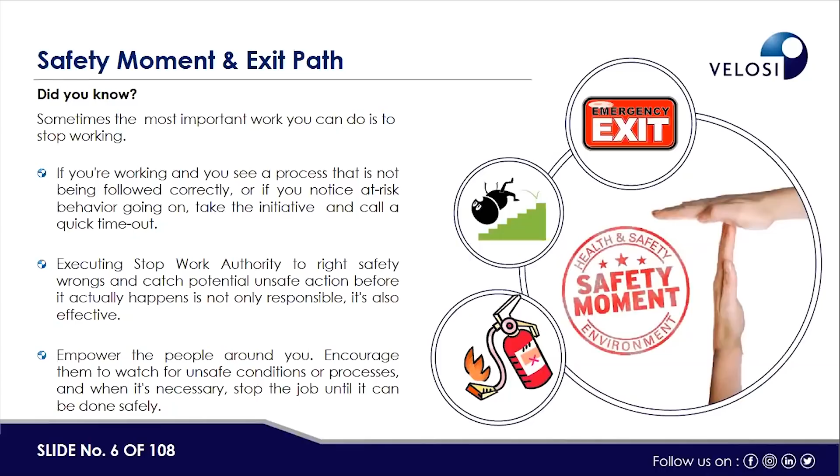Thank you. Assalamu alaikum and good day, everyone. Today's topic is basically focusing on SIMS, Structural Integrity Management System, and that would be specific to offshore, because onshore structures are also part of SIMS, but technically the case studies regard offshore. However, the concept is applicable both for onshore and offshore sites.

From a topic point of view, what is asset integrity by definition? It covers 3 elements: design integrity, technical integrity, and operational integrity. As a basic definition, asset integrity is a continuous process of knowledge and experience applied throughout the life cycle of an asset to manage the risk of failure and events in design, construction, and during the operational phase of the assets. Design integrity means ensuring design for safe operations.

Technical integrity means keeping it in order, with proper processes of inspection and maintenance planning and execution as applicable during the life cycle of the asset. Operational integrity means keeping it running, which involves appropriate knowledge, experience, manning, competence, and decision-making data to operate the plant as intended throughout its life cycle.

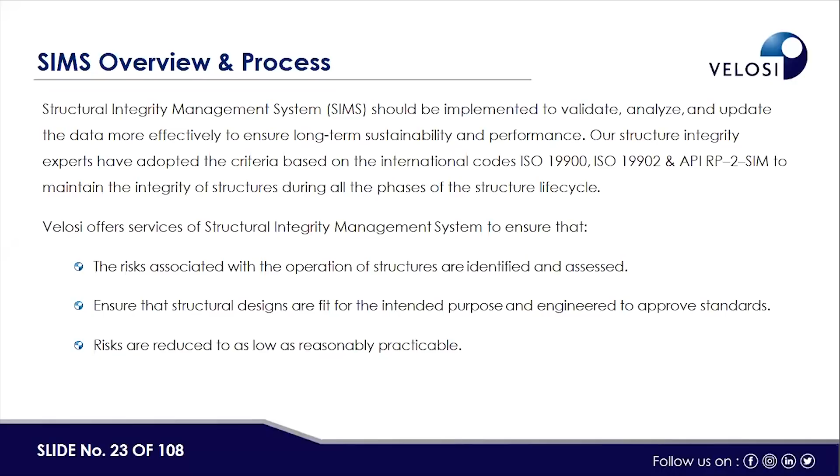The objective of the structural integrity management system, as I said earlier, we are focusing mainly on offshore, but it is applicable onshore as well. It should provide evaluation of structural damage, covering both above and below seawater inspections, fitness to purpose assessment, any possibility of risk reduction, mitigation planning if there is any kind of damage, and the process of decommissioning should also be covered under the same system.

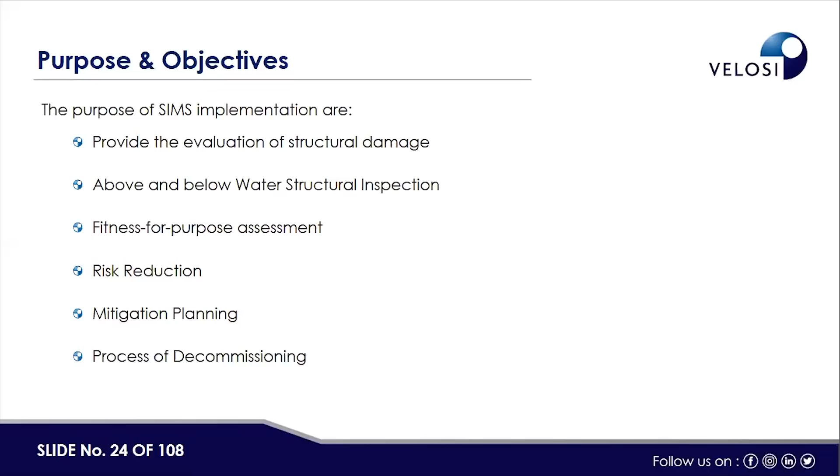From an offshore structural life cycle point of view, if we look at the normal process of life cycle management of subsea structures: first is the original design of the subsea structure, then construction, installation and commissioning, then structures are in the operational phase. These are the 3 main steps.

At the design stage, there are various sets of documents mainly applicable to offshore structures. First is the design basis of the structures, then weight control report for whatever equipment or facilities would be installed on that particular platform. Then there's in-place analysis, pushover or non-linear analysis, fatigue analysis, transportation analysis, load out analysis, and lifting analysis.

Offshore structures are built onshore at a jetty area or offshore construction facility, then moved offshore by barge, and the jackets and top decks are installed with the help of barges, either by lifting or by load out mechanisms. So various kinds of studies are required, with the minimum referred in accordance with API RP2A standard.

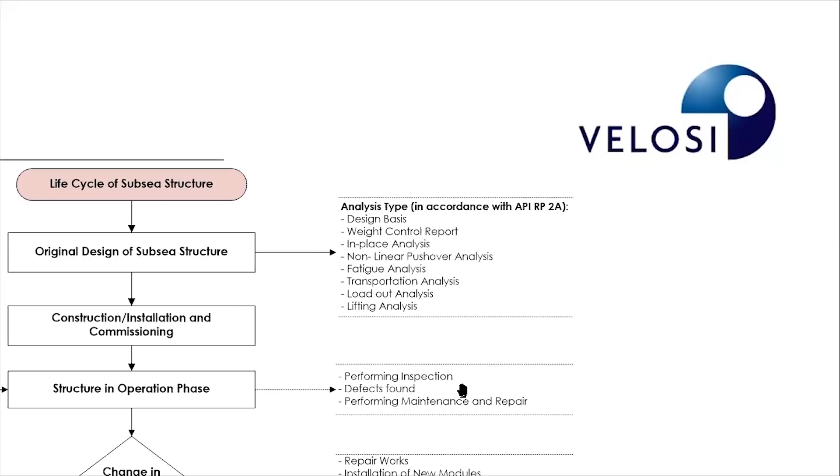Once the structure is in operation, required inspections are performed, which can be done by divers through visual inspections or by ROV. If any defects are found, those defects are repaired or maintained to the acceptance level. There are also cathodic protection anodes, whose depletion rate is monitored, and repair or retrofitting of these anodes is done as life goes on.

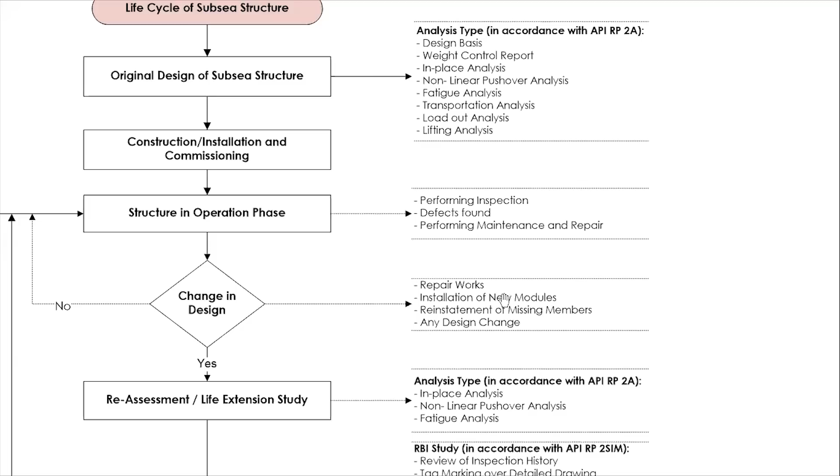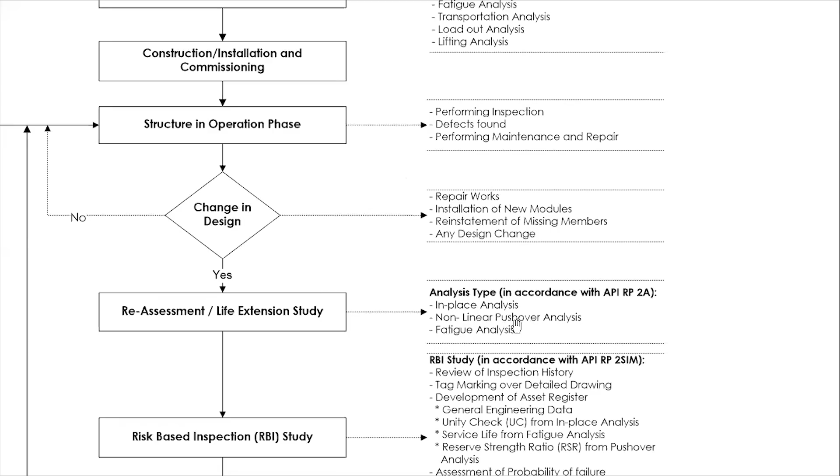If there is any defect or a flooded member found in the structure, repair is required, or installation of new modules or supports as per requirement, or reinstatement of missing members, or any design changes, managed as part of the design change process. If applicable, reassessment and life extension studies are done through fatigue analysis, pushover analysis, and in-place analysis, and decisions for any modification, extra support, or additional member installation are based on these recommendations.

Once it is done under the RBI process, what we do normally in the risk-based inspection program, what Velosi used to develop for future inspections, is the review of previous inspection history, tag marking over detailed drawings, development of asset register based on general engineering data, and unity check from in-place analysis.

Service life from fatigue analysis, reserve strength ratio RSR from pushover analysis - these values are used for probability of failure analysis, then assessment of consequence of failure, risk assessment, and inspection planning. These inspection plans are used in the CMS or ISMS system.

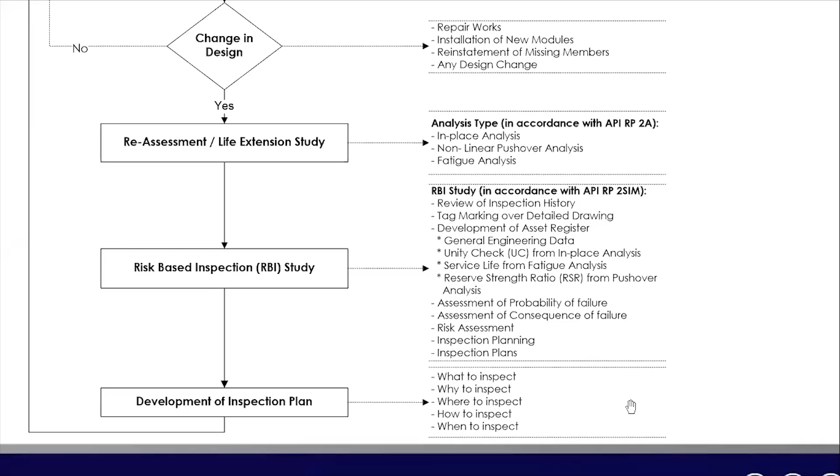When developing the detailed inspection plan, questions like what to inspect, why to inspect, where to inspect, how to inspect, and when to inspect are answered as part of the development of the inspection plan.

For data acquisition and management, when trying to develop the system, we normally need the as-built drawing. Our focus is basically now the asset in operation.

We assume the structure is already designed, built, and installed in the field, supporting operations via the process facilities installed on top of these structures. So what we need to care about now is how to plan the inspection for these subsea and above-sea structures, carrying out applicable inspection and maintenance activities.

For that purpose, we would be following or establishing the SIMS system as the basis. For the asset or structure in operation, we need as-built drawings, previous analysis reports and models, geotechnical data, inspection reports, metocean data of the field, equipment layout drawings, details of modifications carried out to date, existing weight report, and structural design basis.

General regulation and industry standards for offshore structures mainly focus on API RP 2A WSD, for planning, designing, and constructing fixed offshore platforms using working stress design, and API RP 2 SIM, structural integrity management of fixed offshore structures.

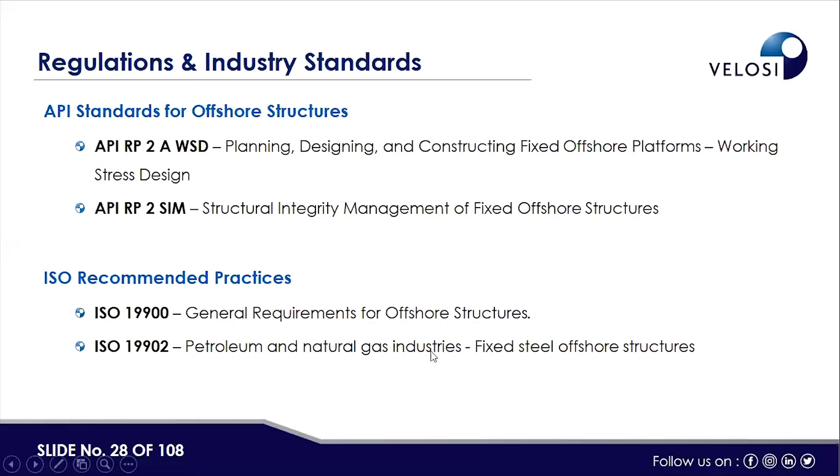Then there are ISO recommended practices: ISO 19900, general requirements for offshore structures, and ISO 19902, petroleum and natural gas industries fixed steel offshore structures.

If we look at the SIM index, titled structural integrity management of fixed offshore structures, various editions are available, the latest being September 2020. As a normal index, for those not familiar with this standard, it covers the scope, nomenclature, various terms and definitions, then structural integrity management overview, which covers general competency, risk, and limitations of the standard.

The structural integrity management process covers data, evaluation, strategy, program, and decommissioning. What kind of surveys or inspections are required is chapter 6. Damage evaluation is covered under chapter 7, and structural assessment processes are covered under chapter 8. It's easy to follow if we just follow the structure.

Similarly, other chapters: chapter 9 is assessment of metocean data, chapter 10 is assessment for fatigue loading, chapter 11 is assessment for seismic loading, and assessment for ice loading applies in areas like Canada or Russia where temperatures are low.

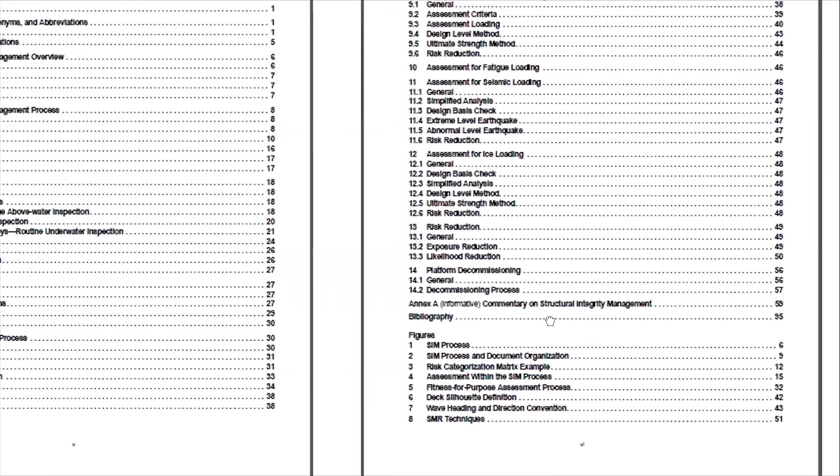Risk reduction practices applicable to structures are covered in chapter 13, and platform decommissioning is covered under chapter 14. So there are a total of 14 chapters, with figures and Annex A that can be easily referred to while applying this practice or developing your SIM system.

The other one is structural integrity management of fixed offshore structures, API RP 2 SIM. The purpose of this recommended practice is to provide guidance to owners, operators, and engineers in the implementation and delivery of a process to manage the structural integrity of existing fixed offshore platforms. This process is called the structural integrity management system, SIM.

The same system can also be used for floating structures, for example an FPSO or FSO, and also subsea structures could be covered under the same system, but we need to add the details of required or applicable criteria for these kinds of assets. This recommended practice provides guidance for the structural integrity management system of existing fixed offshore structures used for drilling, development, production, and storage of hydrocarbons in offshore areas.

Then analysis at the design phase of offshore structures - we give a brief definition of what analysis is required to be conducted. For example, the objective of assessments is to establish current stress levels using latest applicable standards, loading, and in-place conditions, and performing non-linear pushover analysis to establish the reserve strength ratio RSR of the structure.

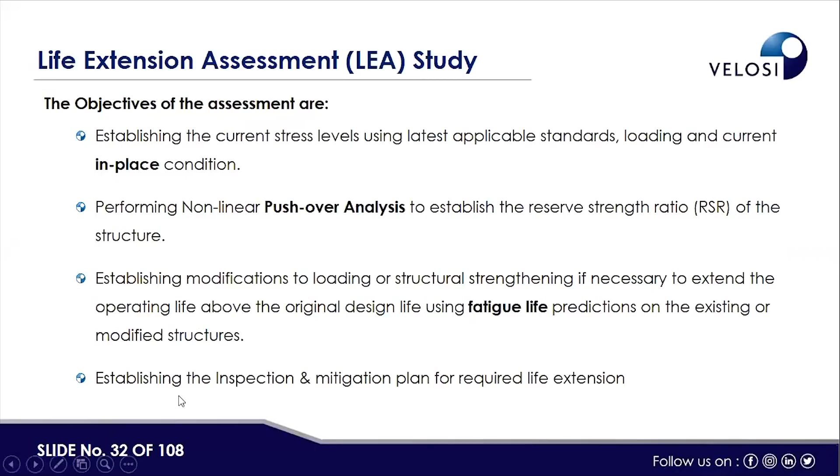Establishing modifications to the loading or structural strengthening if necessary to extend the operating life above the original design life of the structures, using the fatigue life concept. Then establishing the inspection and mitigation plan for the required life extension of the structures.

Now, under in-place analysis, which is the first one: the aim of performing in-place analysis is to ensure that offshore structures withstand the load during operation, both gravitational loads and environmental loads, and should be able to survive extreme weather conditions in the sea.

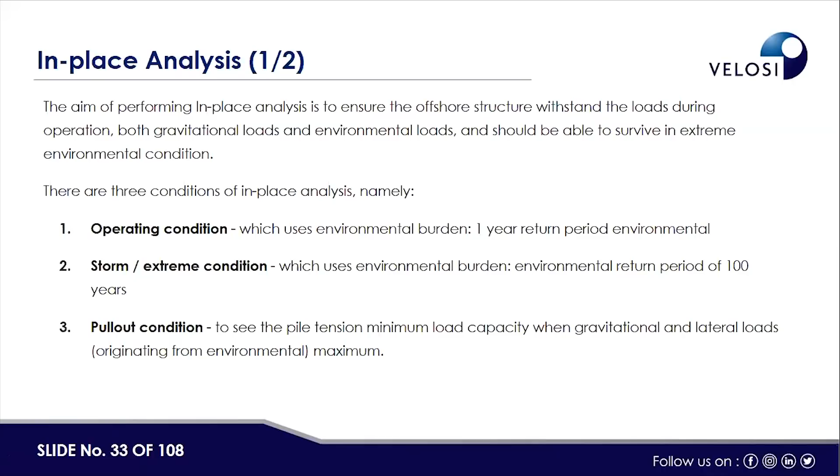There are three conditions of in-place analysis, namely the operating condition, storm and extreme weather conditions, and pull-out conditions. All these three conditions should be modeled while designing the structure, using software like SACS or other DNV software available for in-place analysis.

Similarly, the following results from the in-place analysis should be checked against the recommendation of API RP 2A. For example, member stress ratios, punching shear check, hydrostatic collapse check, pile capacity and stress ratios, and maximum displacement in the members.

The next analysis is the pushover analysis. Pushover is a static non-linear analysis method where a structure is subjected to gravity loading and a monotonic displacement-controlled lateral load pattern, which continuously increases through the elastic and inelastic behavior until an ultimate condition is reached for the structural joint or member.

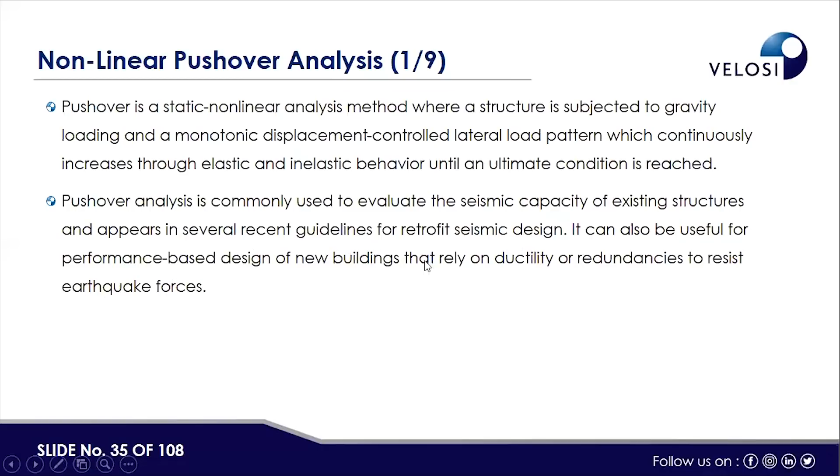Pushover analysis is commonly used to evaluate the seismic capacity of existing structures and appears in several recent guidelines for retrofit seismic design. It can also be useful for performance-based design of new buildings that rely on ductility or redundancy to resist earthquake forces.

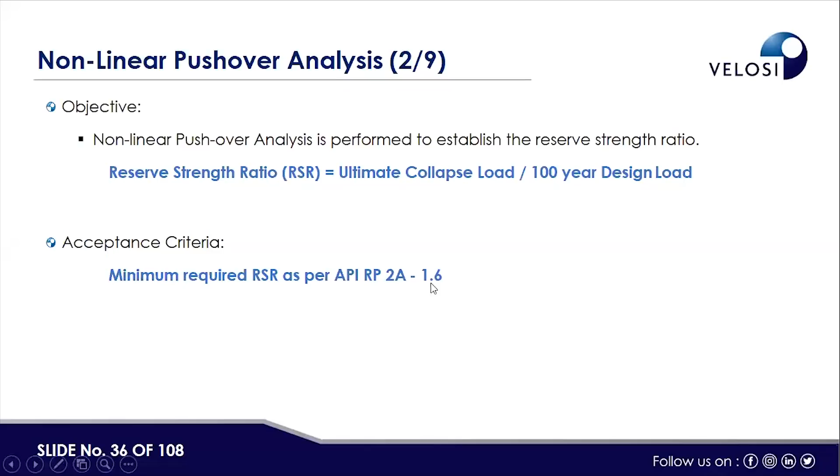The objective of the non-linear pushover analysis is to establish the reserve strength ratio. The RSR is equal to ultimate collapse load divided by the 100-year design load. The acceptance criteria factor should be a minimum of 1.6.

The pushover analysis model intact case requires completely modeling the structure, including the jacket part, deck part, and process part up to the helipad area. For the pushover analysis model damage case, similarly, it has to be covered fully, and if any damage is present, that has to be modeled and shown in the analysis.

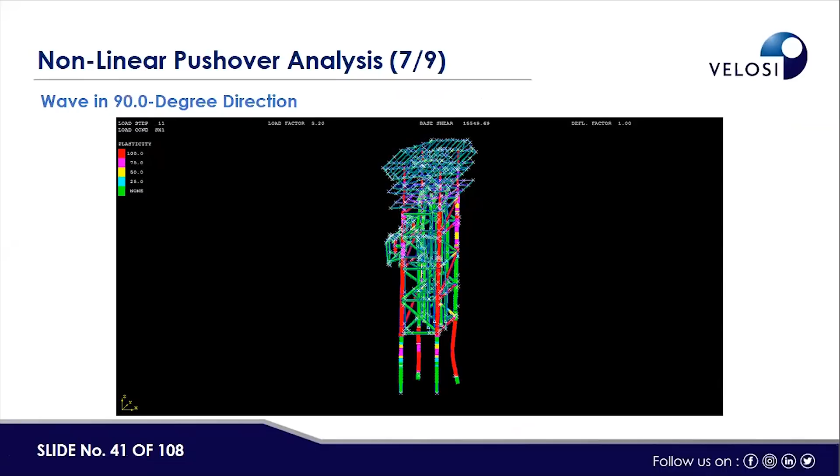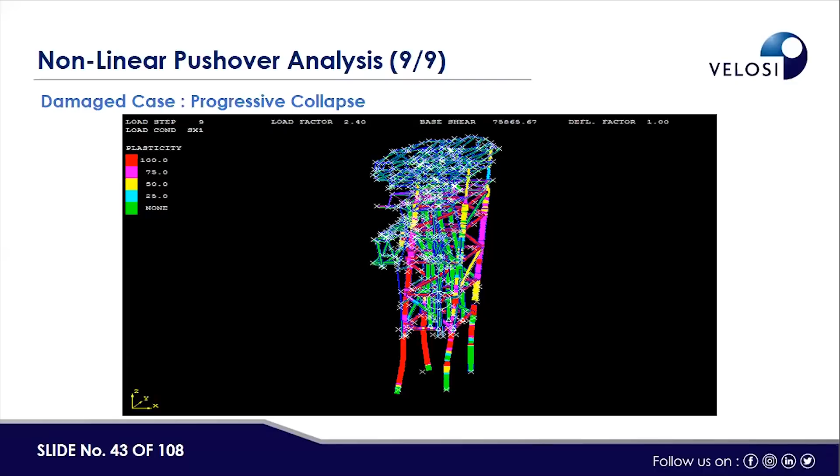We are not covering how this analysis should be done, but just showing what kind of pictures and data are available from the analysis when structural engineers perform it, which ensures users and operators that our structure is safe to operate, whether we are living in the same living quarters in the sea, and during extreme weather conditions we can ensure ourselves that we are in safe hands or a safe place.

Then fatigue analysis is relatively easy compared to in-place analysis. Here, normally we try to establish the fatigue life of the structures and whether it is more than 50 years or more than 100 years. Fatigue analysis is an aspect of vital importance in establishing the dimensions of offshore structures.

This is because of the cyclic nature of environmental loads, particularly sea waves, and the presence of high stress concentrations at tubular node joints due to current and waves under the sea. In the fatigue analysis, the sea surface is represented by a discrete set of waves characterized by period, amplitude, and percentage of occurrence. The expected fatigue life is then obtained by applying each wave to the structure and totaling the individual effects.

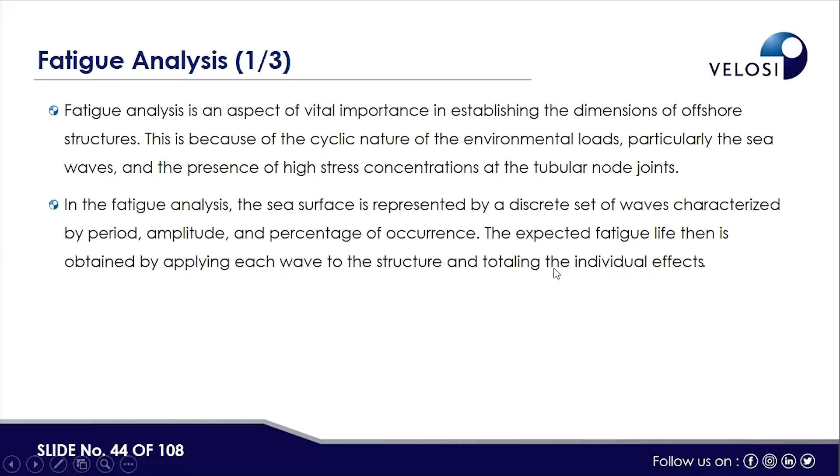What is fatigue? Cyclic loading causing fatigue that, with time, may result in cracks at welded connections of the structural components, joints, or members at any place, though it is mostly critical members.

Unless crack propagation is arrested, the crack can eventually lead to member failure at the joint. The propagation of the crack may affect other members at a joint as well. Cracking originating in a secondary brace, main member, or connection may eventually grow into and affect a primary member as well.

The result from the fatigue analysis is the remaining fatigue life of an aging fixed offshore structure. The acceptance criteria requires that joints on the jacket should show a fatigue life of more than 100 years.

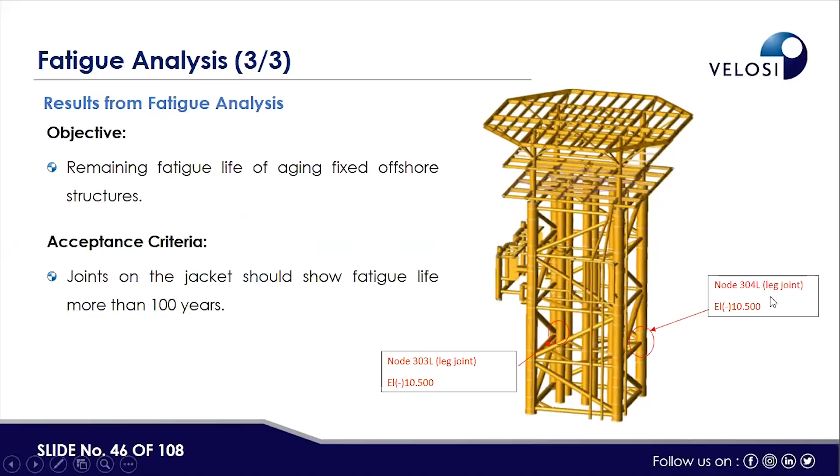And there are members where the nodes have limitations on fatigue life. This side, this joint, you can see here.

A case study, the detail would be covered by my colleague, Mr. Imran Saeed, but there is scope and SIMS content I will cover, and then we will have a break, and then Mr. Imran Saeed will start. So the case study is the implementation of SIM software for offshore platforms that we have done for a major oil and gas company in this region.

The project scope of work was development of a structural integrity management system, a documented system. Then perform risk-based inspection study for the structural platform. As a sample we are showing MDA, JKA, and JKB, the names of the platforms. Then perform criticality assessment, develop an inspection plan for mitigating the risk and reducing cost, and a future inspection plan to be carried out by the client.

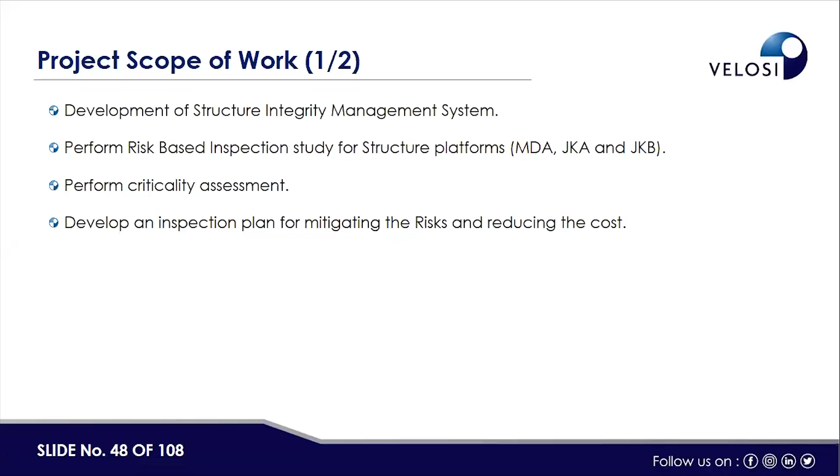Quantification of asset for risk-based inspection study: MDA had total components like members and joints of 382, JKA 2710, which was a major CPF, then JKB 1306. The total asset covered in MDA, JKA and JKB for RBI study is 4398.

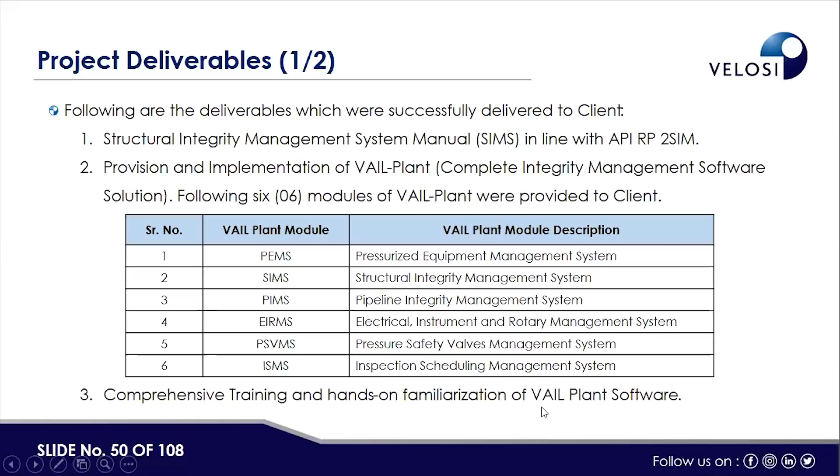The following was the deliverable for the project: structural integrity management system, SIMS, in line with API RP 2SIM, then provision and implementation of VAIL Plant, a complete asset integrity management software solution. Six modules were covered: PEMS for pressurized equipment management system, SIMS for structural integrity management system, PIMS for pipeline integrity management system, EIRMS for electrical, instrumentation and rotary management system, PSV-MS for pressure safety valve management system, ISMS for inspection scheduling management system, and comprehensive training and hands-on familiarization of VAIL Plant software was also part of the scope.

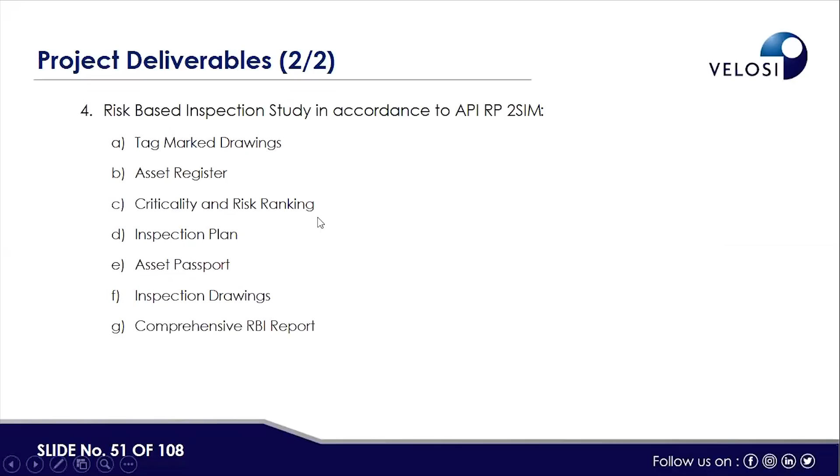Project deliverables for this structural aspect include tag marking on the drawings, asset register, criticality and risk ranking, inspection plans, asset passport, inspection drawing, and comprehensive RBI report.

This is the first part, development of the structural integrity management manual. Velosi prepared the structural integrity management manual in compliance with API RP2 SIM and the company's requirements. The SIM manual covered implementation plans and other aspects required to construct the SIMS program, and applicable standards and literature were used as reference.

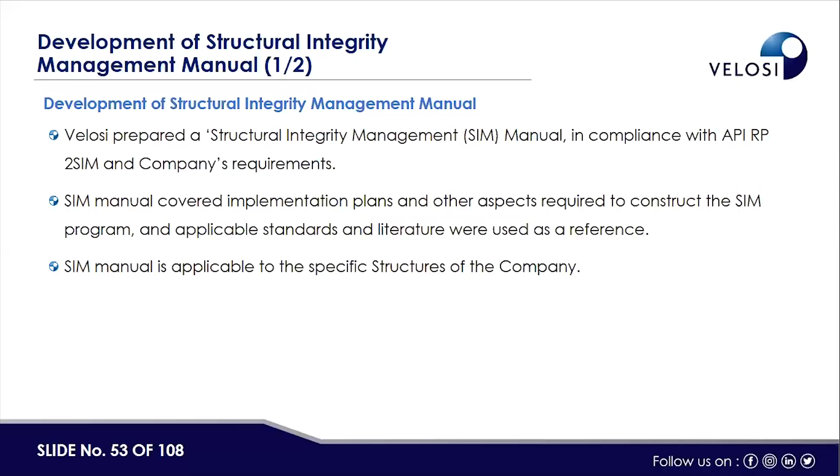Before we go to the SIMS implementation approach, my colleague will take over from here, and we can have some question and answers, whatever questions are there.

There is one question we already discussed: for the structure, does it need a periodic inspection? If yes, what is the frequency for the inspection, and how to define the inspection frequency and prepare the scope of work for the inspection. This will be covered in the next section, and all these questions will be answered, including how we develop the inspection plan, what is the RBI process, and how the interval is also determined by the same RBI process.

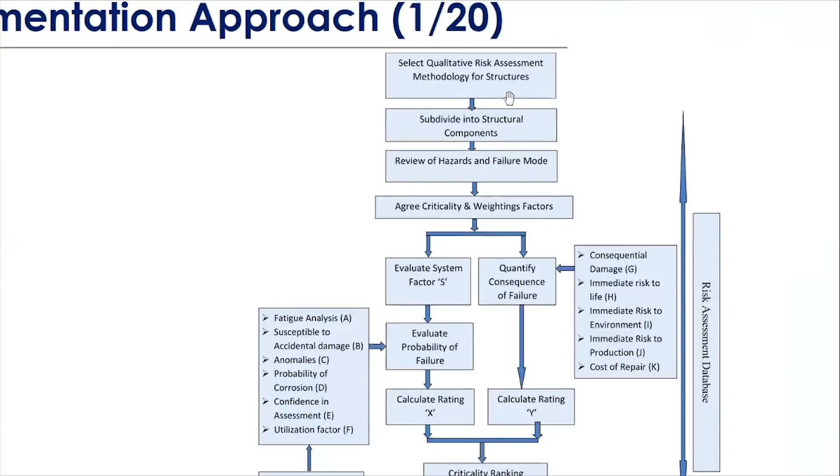Now we are in the second part of the presentation, the SIM implementation approach. If you see this flow diagram, first of all, as part of the risk assessment for the structure, we have to divide the structure into different components: primary component, secondary component, and tertiary component. Then against each component, review of hazards and failure mode.

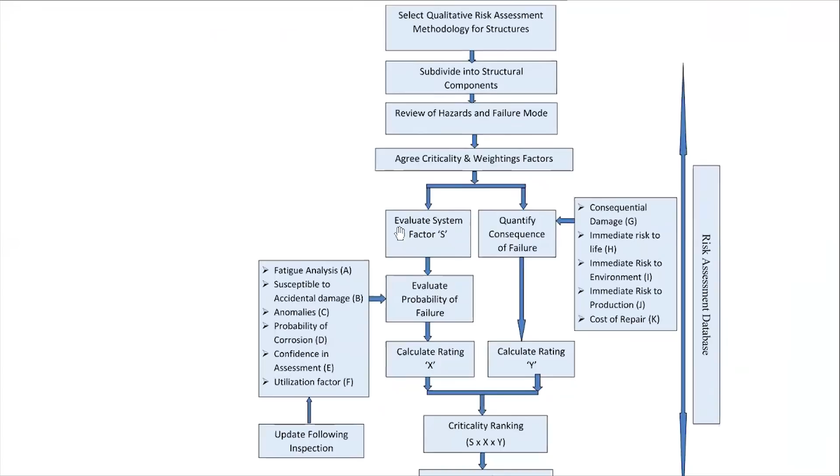Then for a criticality assessment, basically we are considering 3 parameters: the system factor, the probability of the failure, and the consequence.

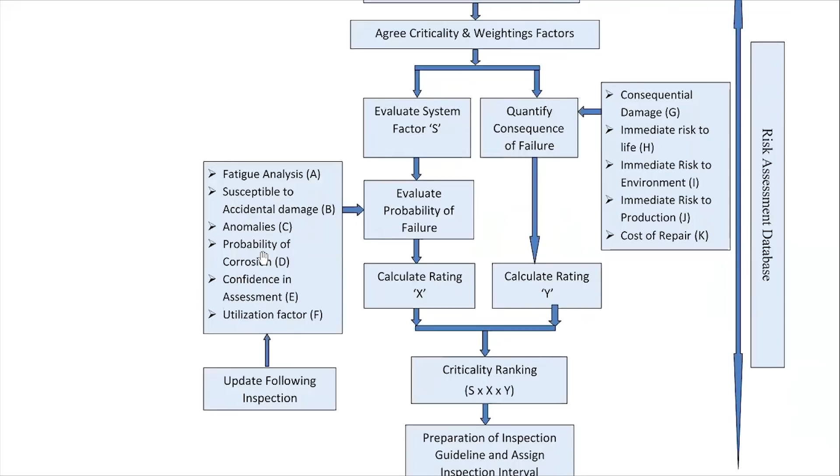System factor is evaluated based on the redundancy factor and the resistance ratio, whereas the probability of failure is calculated on 6 parameters like fatigue analysis, susceptibility to damage, anomalies, probability of corrosion, confidence in assessment, and utilization factor. So these 6 factors are considered for the probability of failure assessment.

Whereas for the consequence of failure assessment, 5 parameters are considered, which include consequential damage, immediate risk to life, immediate risk to the environment, immediate risk to production, and cost of repairs.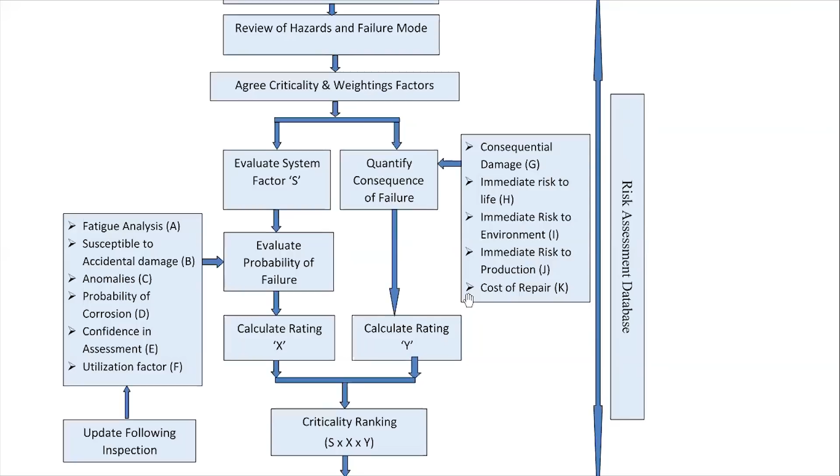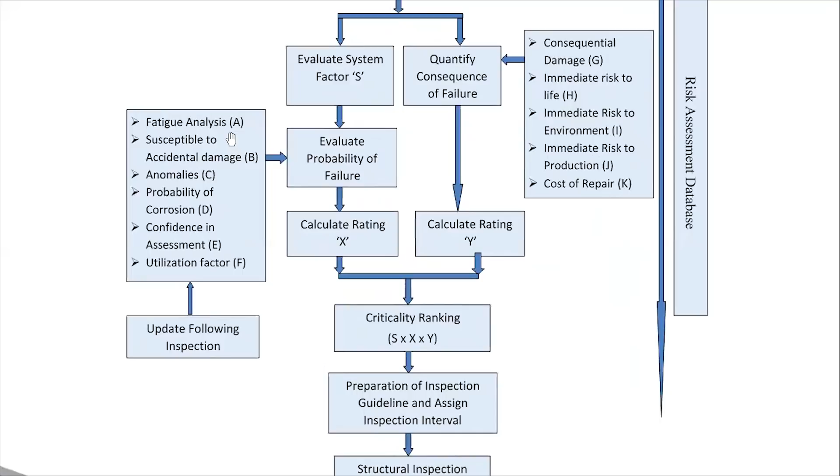Then, based on these 12 factors, we calculate the criticality factor, which is S, the system factor, multiplied by the probability of failure, that is basically the sum of all 6, and multiplied with the consequence of failure. Then, based on the criticality ranking, the inspection plan is developed.

The inspection plan consists of the inspection frequency, inspection coverage, and the type of inspection. So that is basically the overall approach.

So as part of the study, as a first step, the data collection includes the steps we explained: data and information gathering, platform subdivision into structural components, review of the inspection history, condition data, review of the fatigue analysis, in-place analysis reports and plot plans.

Development of the asset database, asset register, then identification of the potential damage mechanism, degradation mechanism, and calculation of the probability of failure, consequence of failure, and the system factor.

We have explained in detail in the previous slide what factors we consider for the POF. Similarly, for the COF, which factors will be considered. Risk ranking and calculation of the criticality, as explained in the previous slide.

The criticality would be the product of the system factor, probability of failure, and consequence of failure.

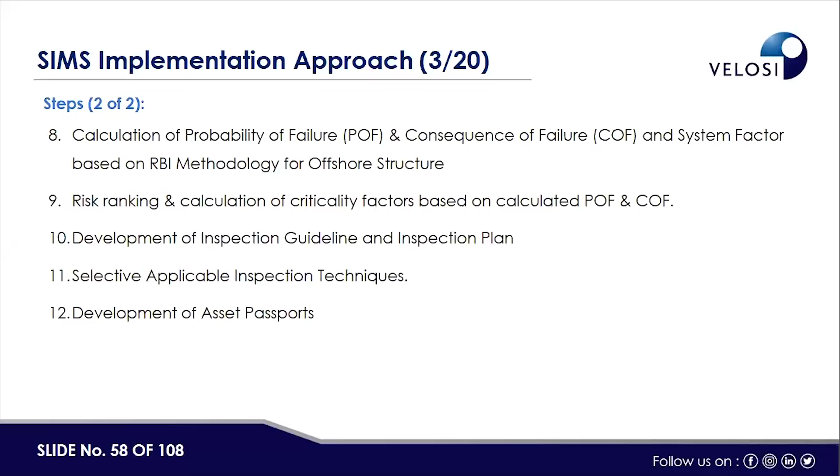After the criticality ranking, the next step would be the development of the inspection guideline and inspection plan. The inspection plan consists of: first, based on criticality, the inspection interval or inspection frequency; based on the failure mode, damage mode, type of inspection, and coverage of inspection; then selecting applicable inspection techniques; and development of the asset passport, or structure summary report.

As part of the SIM study, the following documents have been collected, or are required in order to carry out the study. These minimum documents consist of: structural drawings as built, 3D model if available, inspection reports, details of modifications carried out to date when we perform the assessment, repair reports, replacement and maintenance records, and others.

Then, as part of the analysis reports and models, if you remember when we talked about SIMS, there were a few documents we mentioned as part of the design basis: weight control report, in-place analysis, non-linear pushover analysis, and fatigue analysis.

These studies, which are carried out at the design stage or at any modification, need to be collected and considered in order to determine the criticality assessment.

So the second step, after the collection of data, the structure was divided into different components. The components will be the top side members, splash zone members, and below splash zone members.

The purpose of dividing the structure into different components is so that against each component we can check from the analysis results their fatigue, in-place analysis, pushover, and accordingly their criticality and inspection techniques can be provided in order to ensure the integrity of the whole structure.

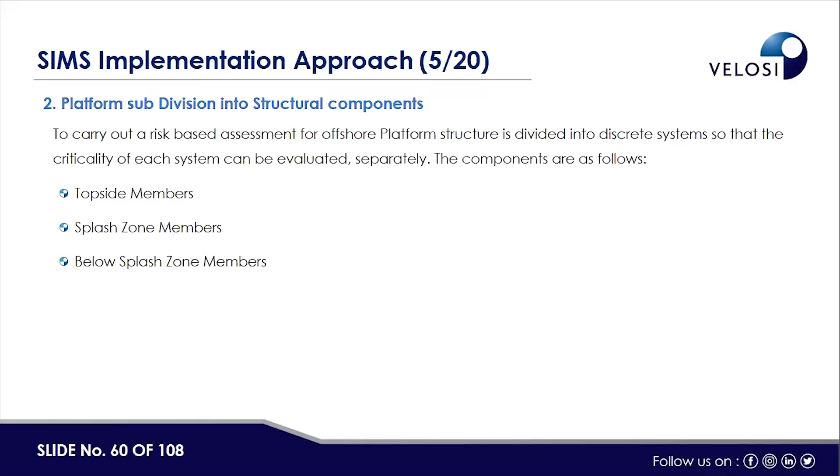So if you will see here, after the components are assigned and marked on a structural drawing, this is a structural drawing where all the vertical members, horizontal members, and the nodes are identified and marked.

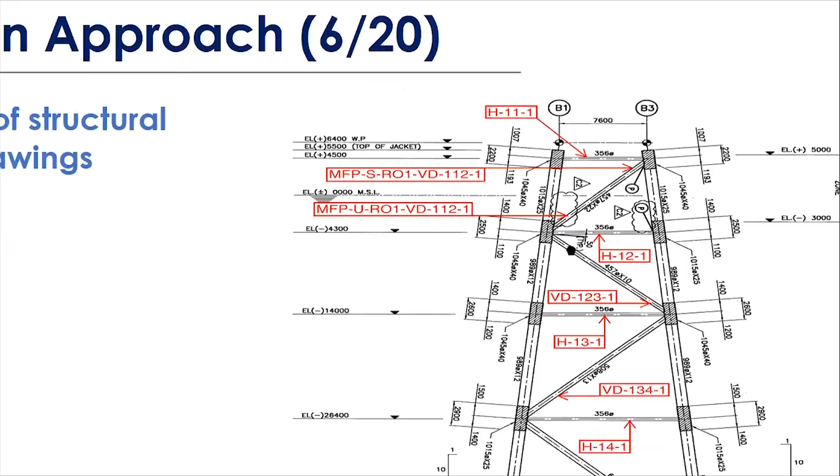If you see this one, there is a methodology. For example, for this horizontal member from one beam to another, the vertical member, similarly the nodes - so all these components are marked on the structural drawing. So against these components, we will check the data from the analysis reports.

The fourth step is review of the inspection history and condition data. The inspection history data and condition data represent the changes to the characteristics that may occur during the life of the platform.

The condition data includes the following: in-service inspection data, for example, underwater inspection, above water inspection, damage evaluation data, corrosion protection data, platform modifications, condition monitoring data, and operational incident data.

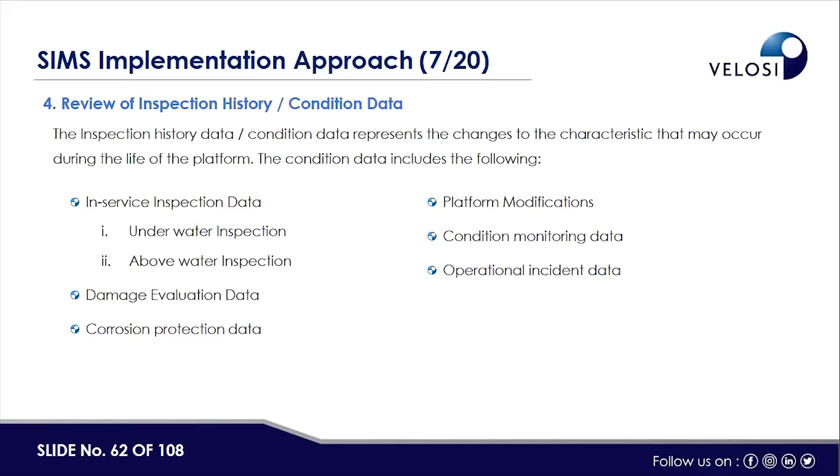So as part of the RBI study, we need to consider, as mentioned in the flow chart, the different parameter factors. The first step is in-place analysis as an input to the RBI study, from which we get the unity check value.

The unity check value, by definition, is the ratio of the actual stress over the allowable stress of the component. Based on the unity check values, we have assigned categories ranging from low to high, provided in the table below.

The unity check for joints and members is obtained from the in-place analysis report. Unity check values smaller than or equal to 1 satisfy the design criteria of a particular limit state. This is basically the acceptance criteria for any member or joint: the unity check value shall be less than 1.

If the unity check value and punching ratio are greater than UR 0.9 and PR greater than 0.95, we assign the category high. For the member UC between 0.85 to 0.9, and for joints between 0.9 to 0.95, medium category is assigned. If the unity check is less than 0.85, and for joints less than 0.90, we assign low category.

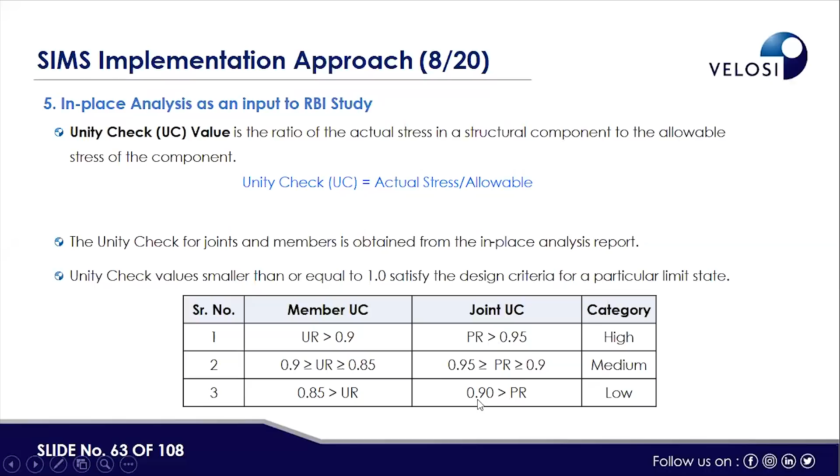Pushover analysis should be performed with intact and damaged structure to calculate intact and damaged RSR. To calculate the worst damage RSR, damages to the legs of the platform at various points should be simulated in pushover analysis, as my colleague Mr. Rijaz explained in detail during the first part of the presentation. Pushover results are required to directly quantify the probability of structure collapse resulting from a disconnected member.

The following should be used to select the system factor. For example, if the reserve strength ratio is less than 1, we assign the system factor weightage as 1.0. This system factor weightage is multiplied with the probability of failure and the consequence of failure. If RSR is between 1 to 1.2, then 0.8.

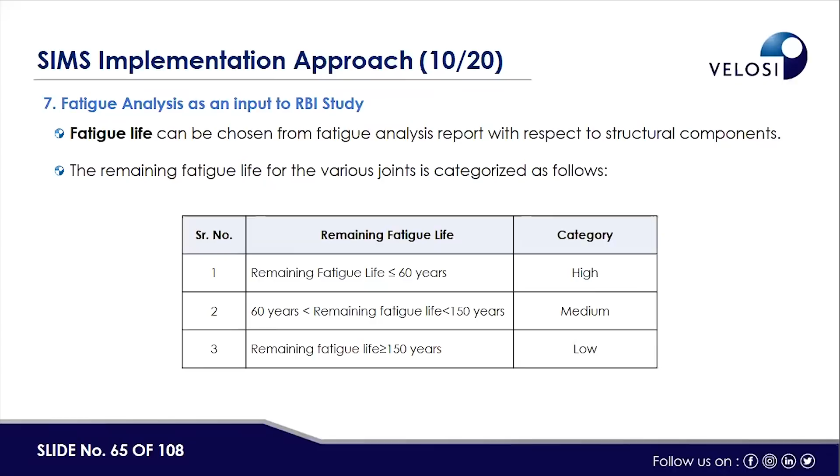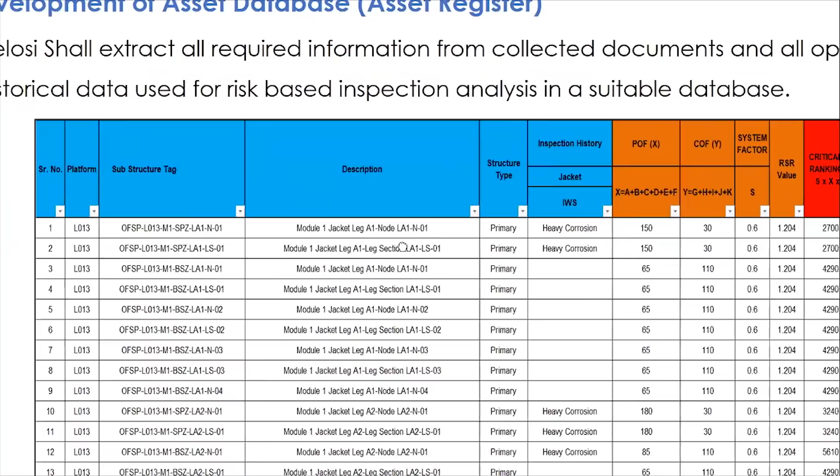After completing these steps, like dividing the structure into different components, we prepared a database including structure components, descriptions such as members, horizontal nodes, legs, the structure type whether primary or secondary, and from inspection history any corrosion damage that occurred. Then from the different parameters observed, we include probability of failure, consequence of failure, and the system factor derived from the RSR value. In this way, the database is prepared for the software.

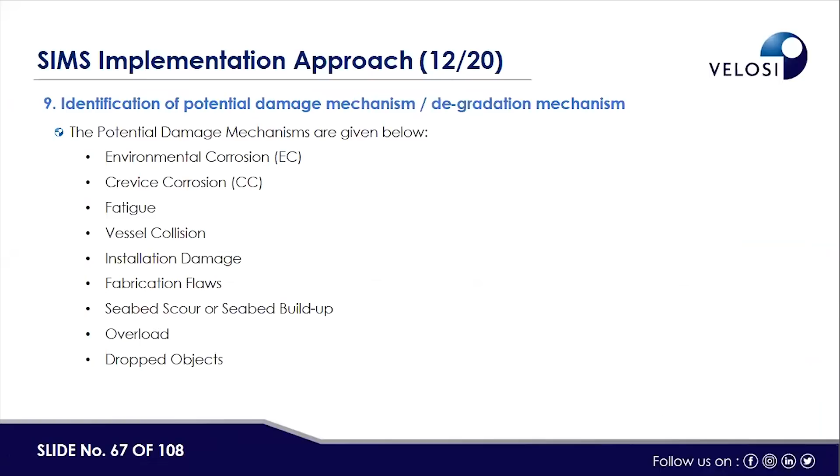As part of the damage mechanism or degradation mechanism, the following are the potential damage mechanisms for offshore structures, which include environmental corrosion, crevice corrosion, fatigue, vessel collision, installation damage, fabrication flaws, seabed scour or seabed buildup, overload, and dropped objects. These are the potential damage mechanisms or failure modes related to structure integrity.

Then, as part of the platforms covered under this study, the following hazards and failure modes were observed: environmental corrosion, crevice corrosion, and fatigue.

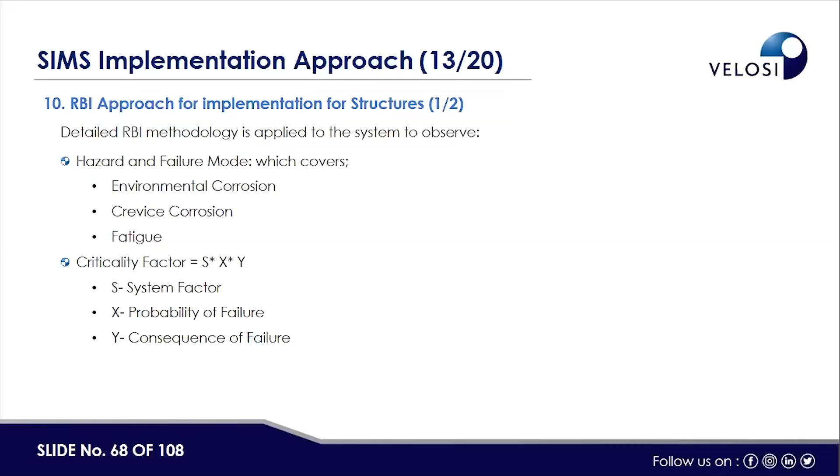Then the criticality was determined for the system by using the equation S into X into Y. X is the probability of failure, taken from 6 parameters, and Y is the consequence of failure, taken basically from the 5 parameters that we mentioned in our previous slides. So the same we are basically mentioning here.

So if you see this one, the criticality ranking, the system factor. So system factor is basically the redundancy factor, dependent on the importance of individual components to the overall structure integrity.

The probability of failure for the structure component has 6 parameters: fatigue analysis, accidental damage, anomalies, likelihood of corrosion, confidence in assessment, and utilization factor. The sum of all 6 parameters will give us the overall probability factor.

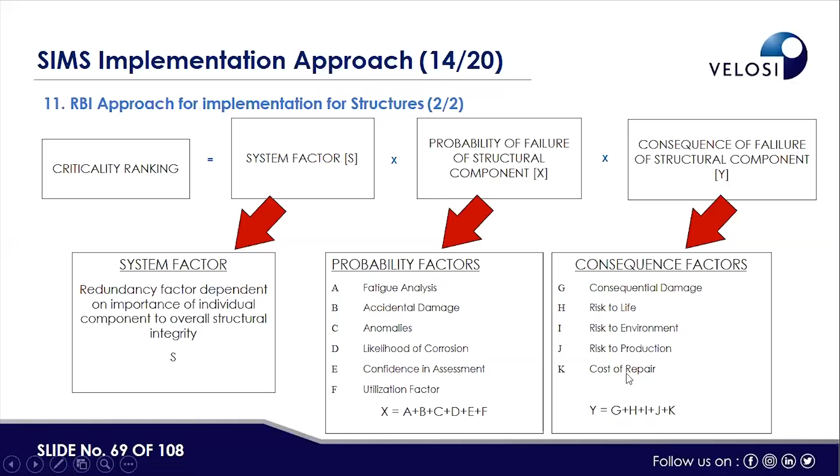The consequence of failure has 5 parameters that we use for assessment of the COF, which include consequential damage, risk to life, risk to environment, risk to production, and cost of repair. The sum of these 5 parameters will give us the overall consequence factor.

We basically assigned the weightage against each factor with respect to their ranking, from low to medium to high. Then the weightage for each factor is assigned, for A to K factor, for the probability and the consequence factor. These weightages are used in the system to calculate the overall criticality.

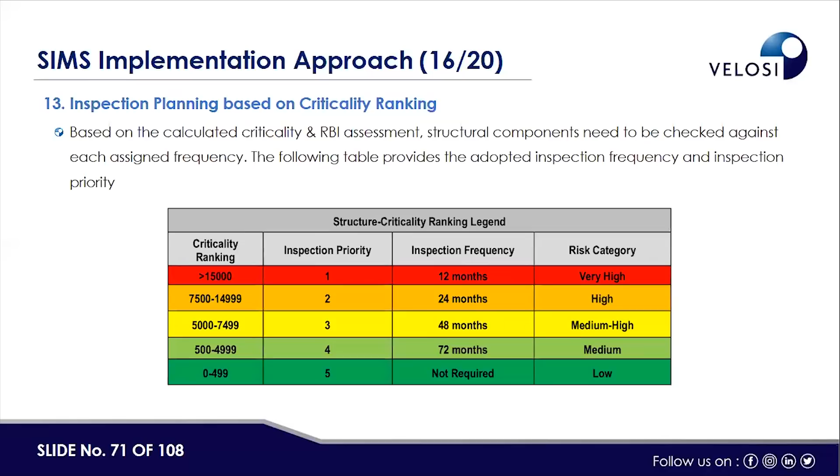There are different types of inspection that need to be carried out, and as part of this study we recommended GVI, close visual inspection, then ACFM, and CP surveys.

So during the operation phase, surveys should be performed in order to safeguard human life, property, protect the environment, and prevent loss of natural resources, in accordance with API-RP2 SIM.

Based on the calculated criticality ranking, the inspection plan is developed. However, it is recommended that general visual inspection should be carried out for all structure components annually. If protective coating breakdown or excessive corrosion is observed, then thickness measurement should be performed.

This is basically based on the GVI; for any members where excessive corrosion is observed, then thickness measurement is to be taken for those members in order to check the remaining life.

Nodes and joints in the subsea under high risk shall be inspected. The frequency was defined by using the ACFM to detect any crack initiation.

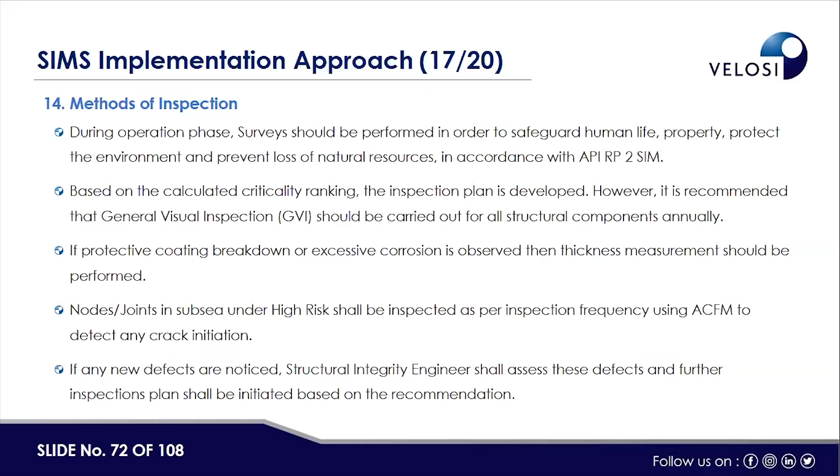If any new defects are noticed, the structure integrity engineer shall assess the defect, and further inspection plan shall be initiated based on the recommendation. As we are all aware, it's not a one-time study, it's basically a complete process. Then again, based on the inspection survey, we need to re-evaluate the criticality assessment, so after every inspection, the evergreening is to be carried out.

The purpose of the inspection is to detect or verify the following: indication of obvious overloading, deteriorating coating system, excessive corrosion, and bent, missing or damaged members of the structure in the splash zone and above water, damage or deterioration to appurtenances and personal safety, escape and evacuation devices, and the performance of the platform's underwater CP system.

The applicable inspection techniques used for the condition assessment of the steel structure consist of visual inspection. In visual inspection there are two types: one is general visual inspection, done annually, and then close visual inspection, along with MPI, ACFM, CP survey, and ultrasonic thickness gauging.

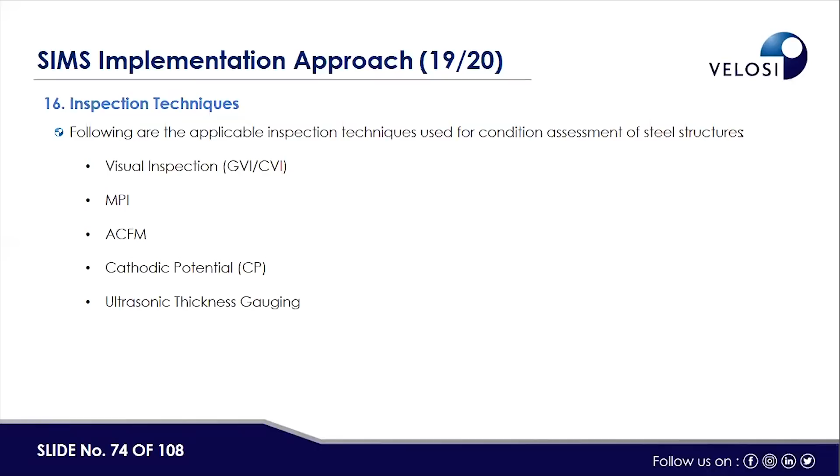For each platform, an overall structure summary report, called the assessment report or task force report, was prepared, which includes a brief description of the assets, criticality metrics, results, conclusion, and recommendations. So as part of the study, we used our system.

Before going to that one, we will take some questions. There was one question: have you any experience of using SACS advanced class? Is it comparable to USFOS? Pros and cons?

Yes, our structure integrity engineers have vast experience using SACS models. For any particular query, you can just send us through the email, and our engineer will come back to you.

Then the next question was: why did I not consider on-bottom stability analysis, ship impact analysis, seismic analysis? If you see in our failure mode and failure identification, vessel collision was considered.

Then for the seismic analysis, for the structure integrity management system, we are considering the studies, and this seismic analysis was considered for your reserve strength ratio, and from those values we have taken the inputs for the studies and we use that.

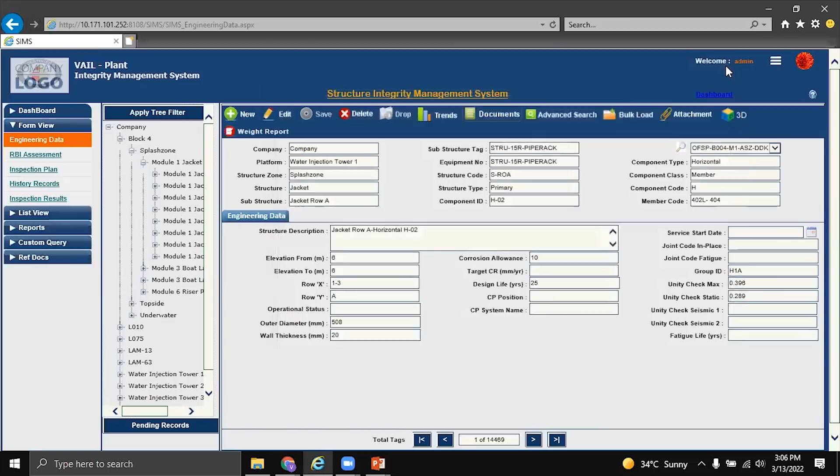We can also integrate the system with any document control system or vision for the structure. One option is that we can do the bulk loading.

Second, we can also add or edit new trends here. These are the trends where we can see different trends with respect to the structure, like leak, defects, risk, anomalies, that can be seen with respect to the different component, and exported into Excel also. Second, when we go to the second part, that is the RBI assessment.

So if I go to any component, I'll go back to the presentation so that we go to the system again. If you see this one in the presentation, first is the engineering data for the structure description,

elevation, the rows, the axial stress values, then if any CP system is installed, the unity check values, operational data, bending stress, shear stress factor. So all these structure values, stress values are written.

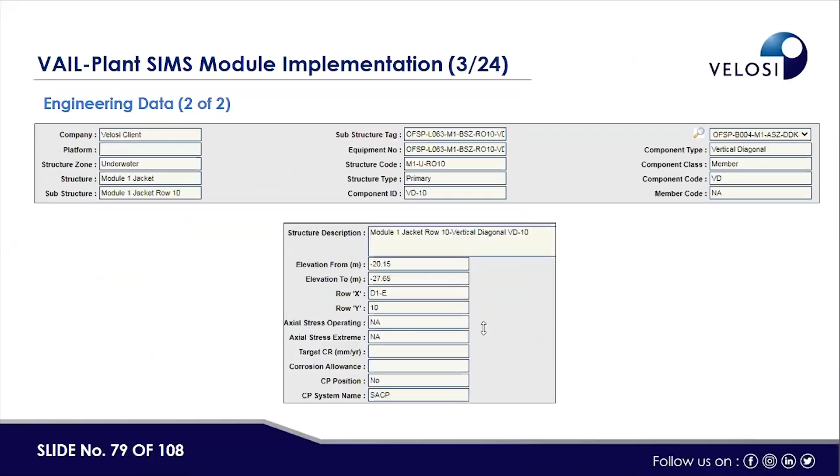Same as shown in the engineering data, as we explained through the system also, like the company structure module. Against all the structure data, we are also collecting the inspection history.

In the inspection history, there's general visual, failure record, replacement. For example, from the general visual inspection, GVI surveys, the module, the position, any anomaly observed, then how much percentage covered, what were the remarks.

Then the ultrasonic thickness gauging, if carried out against any members, their frequencies, thickness values, compared with respect to the nominal thickness, and the corrosion rate and metal losses calculated. If multiple inspection records are available, then that can be presented in a graphical form.

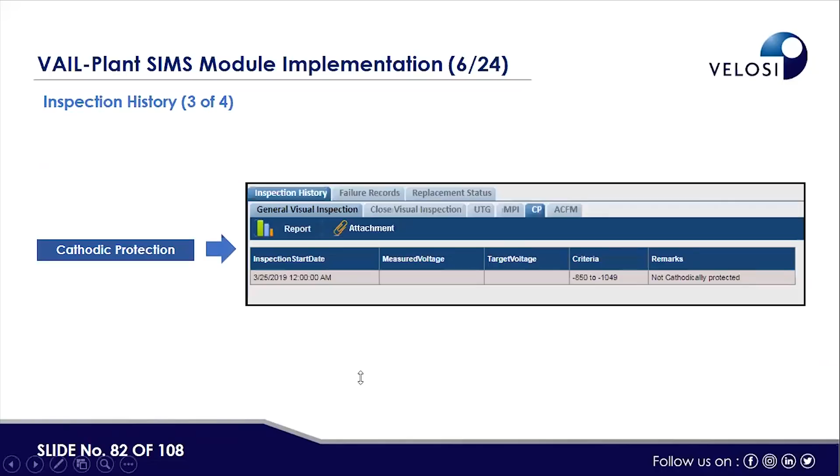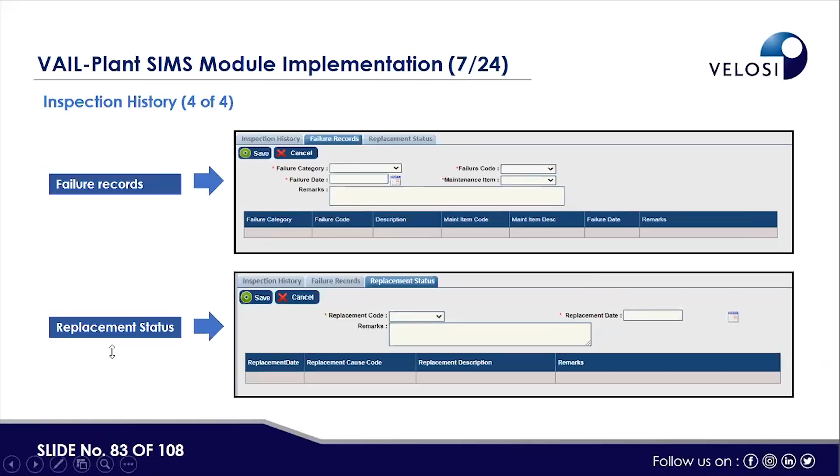For components under CP protection, their record is mentioned here, the CP protection criteria. In the inspection history, failure records are documented into the failure record tab, and similarly, if any replacement carried out, that is recorded and documented into the replacement status.

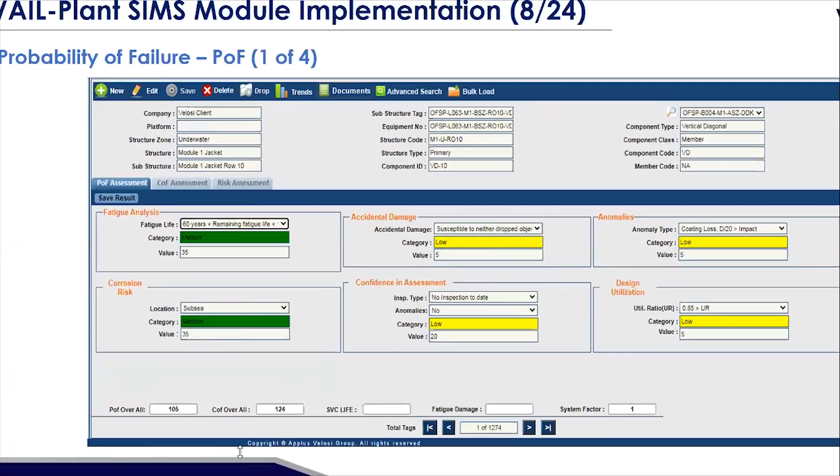For the probability of failure assessment, before going to the software page, I'll just go to the presentation, then we'll go back to the software. In the POF, the system calculates these factors: fatigue analysis, accidental damage, anomalies, corrosion risk, confidence assessment, design utilization factor, then the overall probability of failure, the system factor is multiplied.

Next, in the fatigue analysis, as mentioned earlier, the system considers the remaining life, then based on the remaining life, there is a weightage for this factor.

For accidental damage, based on the type: if susceptible to dropped object and impact, it's high; if susceptible to dropped object or impact, medium; and if susceptible to neither dropped object nor impact, then it will be low.

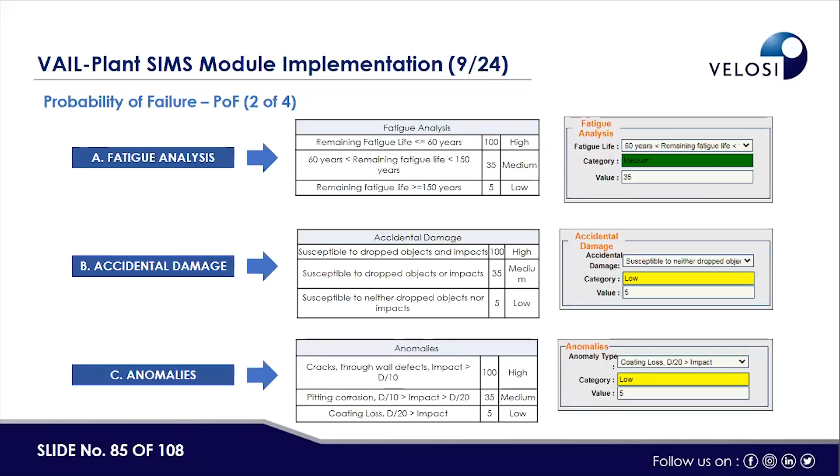In the anomalies, three parameters are considered. One is the crack: if the crack or through-wall defect is greater than d/10, high weightage is assigned. If pitting corrosion is d/10, or impact is d/20, then medium. If coating loss and impact is less than d/20, then low.

From the corrosion risk assessment, the structure is divided primarily into three parts: the splash zone, subsea, and the above splash zone or topside.

So the members are the components which are in the splash zone, high chances of corrosion, which are in the subsea; medium, which are above the splash zone at top side; and low risk susceptibility to corrosion.

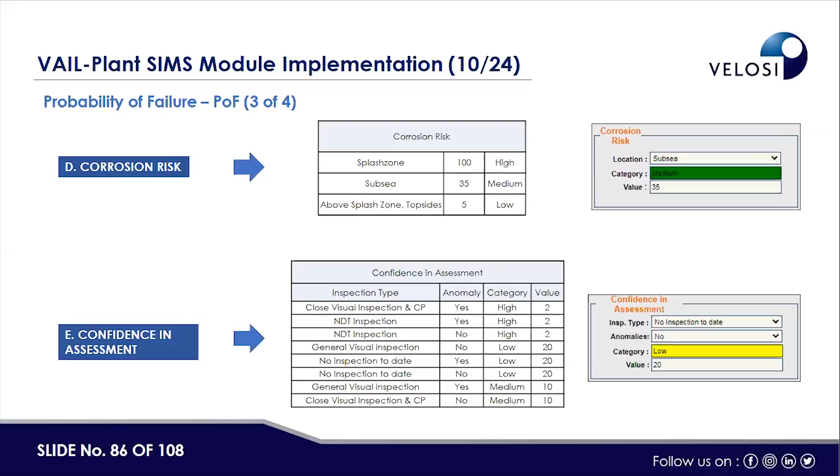Confidence assessment is based on previous inspection records, if any close visual inspection, CP survey, or NDT has been carried out. Based on past inspections, the confidence in the assessment is checked and weightage is assigned. In the design utilization factors, the system will check the unity check values and punching ratio, then calculate the design utilization.

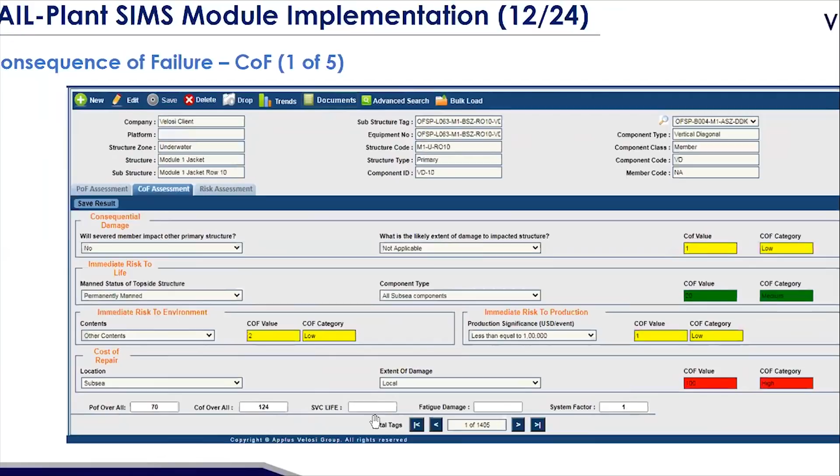Then at the bottom you will see the overall POF, overall COF, SVC life, and the system will calculate the overall criticality. This is the detail for the consequence of failure factor.

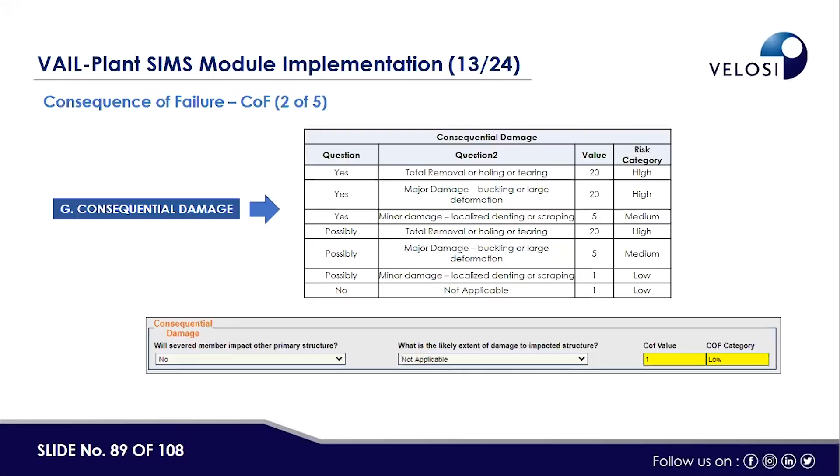The questionnaires used include, for example, total removal or holing or tearing as high risk category, major damage or buckling or large deformation also as high consequential damage. Minor damage, localized denting or scraping is medium. Total removal or holing or tearing is high, major damage buckling or large deformation is medium, and minor damage localized is low.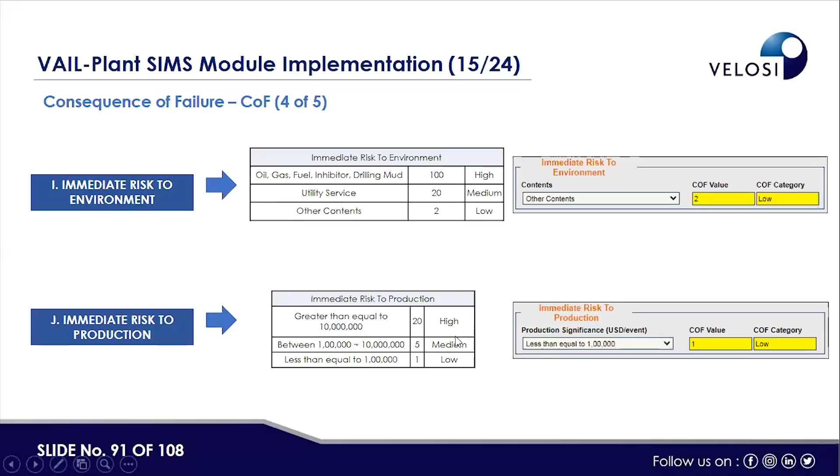For the cost of repair, we have a different set of questionnaires with respect to the repair carried out at different components of the structure, which are in the subsea, splash zone, and top side, and the repair type, either extensive, local, or slight. Based on that, the risk category was assigned.

For example, for subsea extensive it would be high, for subsea slight it is medium, topside slight is low, and topside extensive is medium. So these are the different sets of questionnaires used to determine the cost of repair as part of the COF.

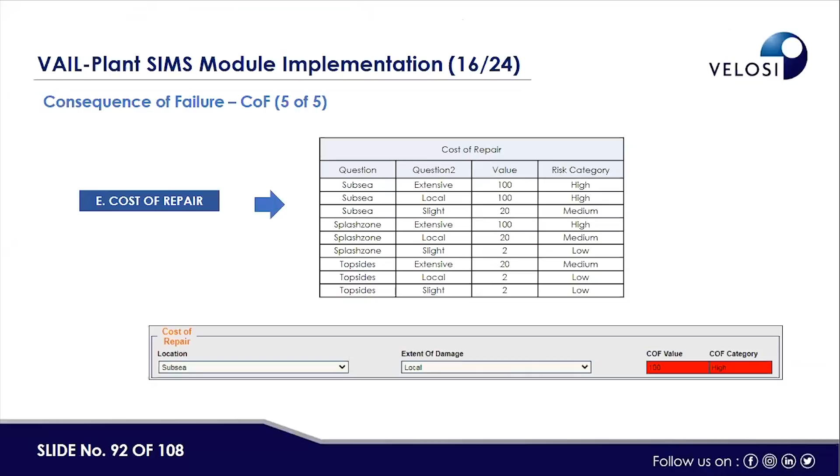The criticality ranking from the system gives the overall results, like the POF factor, COF factor, and the overall criticality. The system will give the summary.

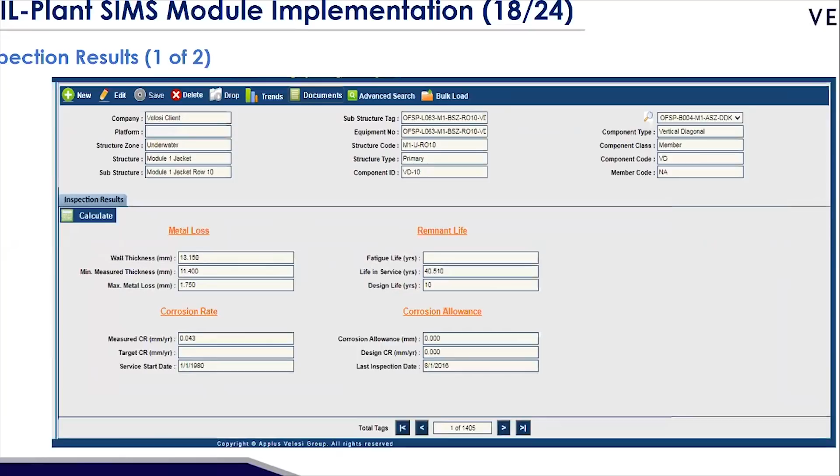From the inspection history, like the thickness measurement record, the system will calculate if any member thickness was measured, the base thickness data recorded, and based on that, calculate the metal loss, remaining thickness, and corrosion rate, along with the inspection results as explained.

Then the system will prepare the inspection plan as an inspection reference plan, like the type of different inspections to be carried out - close visual, general visual, ultrasonic thickness - with respect to criticality, their inspection interval, and when the next inspection is to be carried out.

The system will also give the logistic requirements, such as the resources, equipment, and people required in order to carry out the inspections.

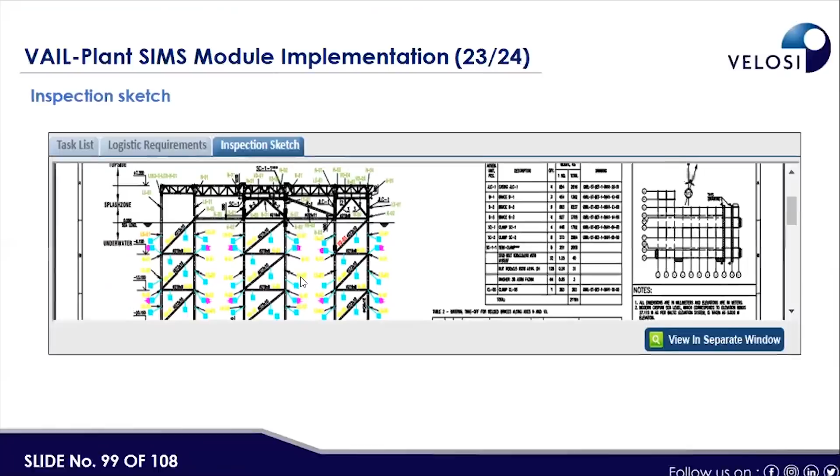Then the inspections, the type of inspection, are marked on the structure drawing with respect to the different member nodes, showing what type of inspection is to be carried out.

The overall dashboard, as we presented as part of the study - these are the findings which, though not definitive, are noteworthy. The platform is a relatively new platform.

The RSR value was considered as 0.4. Some studies were not carried out, which we have highlighted. According to the visual inspection report, minor anomalies were observed, and minor corrosion criticality was in between medium and low. According to the drop cell test result, CP protection is adequate for the platform.

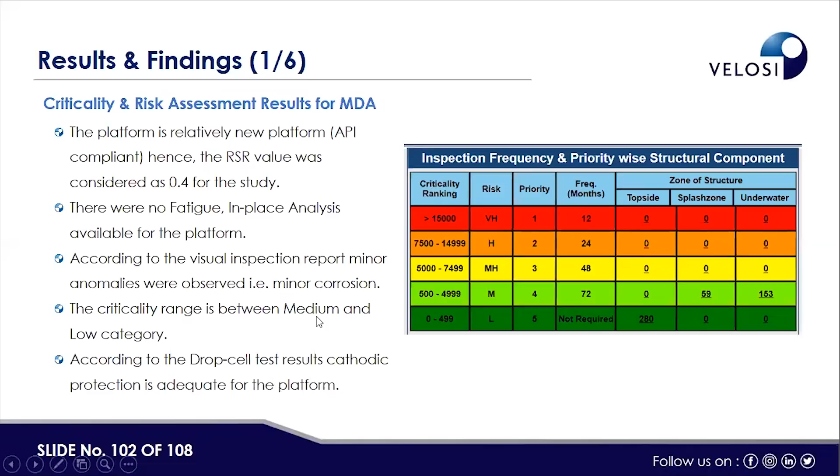According to the drop cell results, CP is adequate for all the platforms. The platform is divided into production and raised service platform, and an RSR value of 0.9 was considered.

For the 107 component, which is underwater, the criticality is very high, and the CP values were found to be less than the acceptance criteria, which is 850 to 1100 millivolts, signifying the protection is not adequate in the undersea zone. The risk category for the 73 component is high due to the UC value greater than 0.8 found in the in-place and seismic analysis. Also, major anomalies, like bends in legs, were observed in some components.

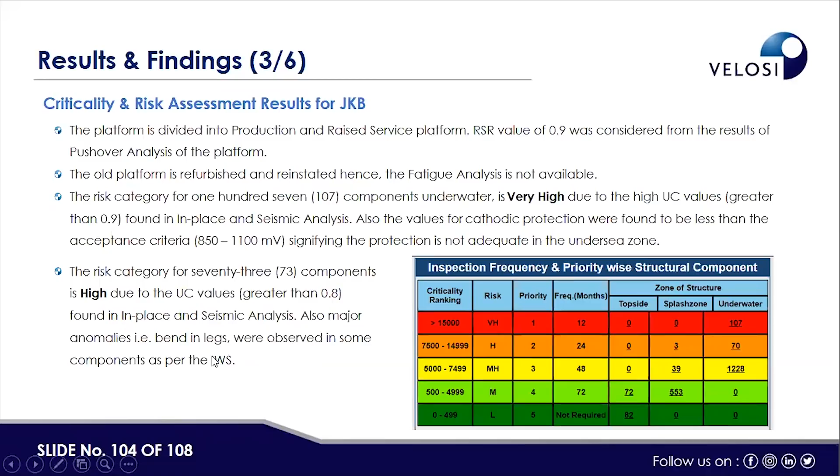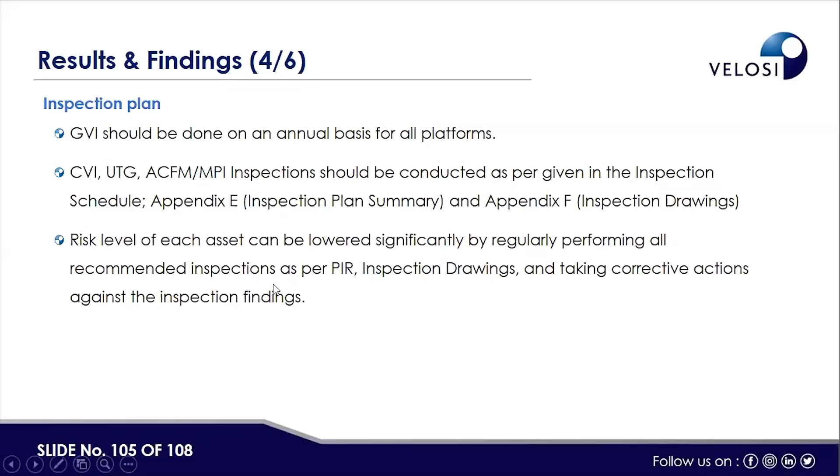As per the inspection plan, recommendations were provided, like GVI, CVI, UTG, ACFM, and MPI to be carried out, and the components were marked where UTG, ACFM, or MPI needed to be carried out at different nodes. Risk levels of each asset can be lowered significantly by performing all the recommended inspections, because inspection will enhance confidence, and then as part of the reassessment, you will check the further condition. The sample drawings, where different types of inspections were marked as part of the recommendation, and the asset passport summary was prepared and generated.

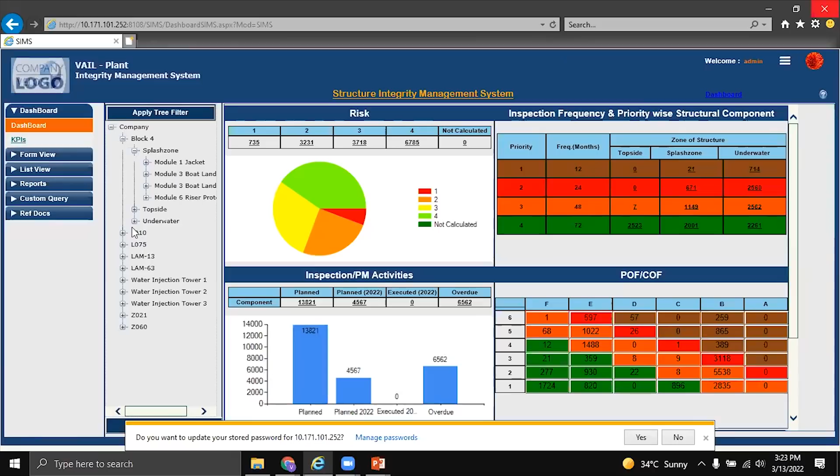Now we will go to the system. This is the dashboard for the structure, as explained in the presentation. The dashboard represents the risk, inspection frequency, PM activities, POF, and COF. On the left side is the hierarchy, from platform, then platform splash zone, top side, underwater, then in the splash zone, different components, top side and underwater. In the form view, we have the engineering data, RBI assessment, and inspection plan.

For any component, when we click, on the top side is the hierarchy as mentioned, then at the bottom, the engineering data: structure description, elevation, operational status, diameter, wall thickness. For the particular component we selected, like the conductor section, the corrosion allowance, design life, service start, and unity check values. On the top, we can see the documents related to that component, and we can also add the component drawings, as mentioned earlier.

Then in the RBI assessment, from the probability of failure, these are the factors: fatigue analysis, corrosion risk, accidental damage, confidence assessment, anomalies, design utilization. Then the system will calculate the overall probability, the POF system factor.

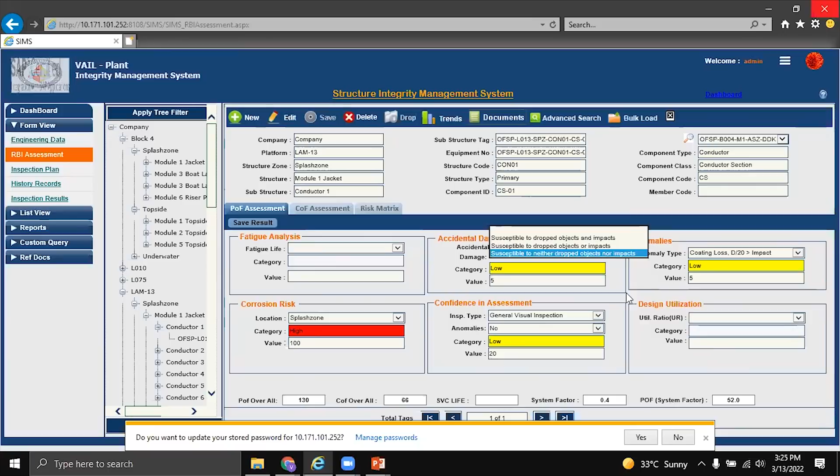Here, basically with respect to the remaining fatigue life, we will select from accidental damage based on the susceptibility, either dropped object, impact, or any or none. Then the anomalies, by the type of impact, size of impact, the corrosion risk based on where the component is present, confidence assessment, UVC value. The COF assessment system will calculate based on these parameters.

The COF, then the risk matrix, the overall risk matrix of the components for this component, so it belongs in this one, the green category. For this system, we are using the 6x6 matrix. We can also use the 5x5, but for this, what I'm showing is 6x6. The probability and the consequence of failure, then the system will give the overall risk for that component.

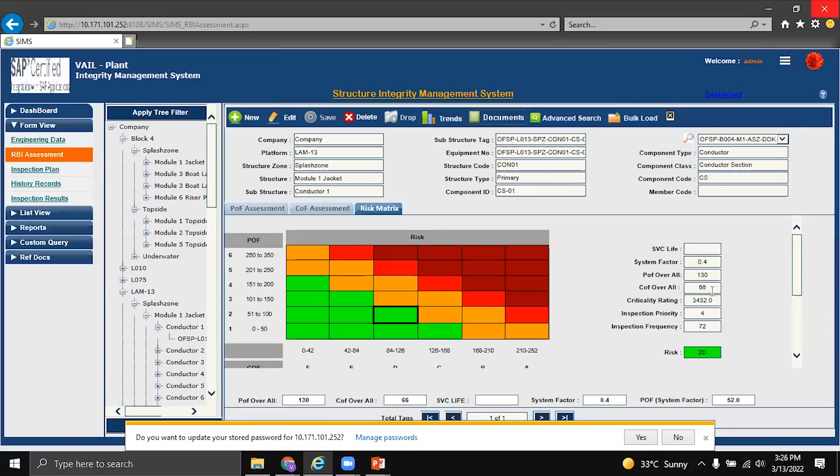On the right side, you will see the system factor value for the component: overall POF, COF, criticality ranking, and inspection frequency. In the inspection recording, the history of different types of inspections that have been carried out would be recorded here, like GVI, CVI, UTG, recorded here with respect to TML points. Then the inspection plan, as part of the risk assessment regarding the inspection plan, is generated from the system.

For example, for this component only this GVI. So based on the different type, if I go to any other component, there are different types of inspections given for the components. These are with respect to the criticality assessment.

Then the inspection results. These can be viewed from the system. Based on the recording, the system will calculate the metal loss, remaining life, corrosion rate, and allowances. These are shown in the form view, and we can also review this data in the list view form.

Then there are the reports, different reports built into the system that can be generated, like a summary report or criticality report. With respect to the different platform, for which component we require, we can just select it and generate the report from the system. So these are the built-in reports, and we also have the custom query.

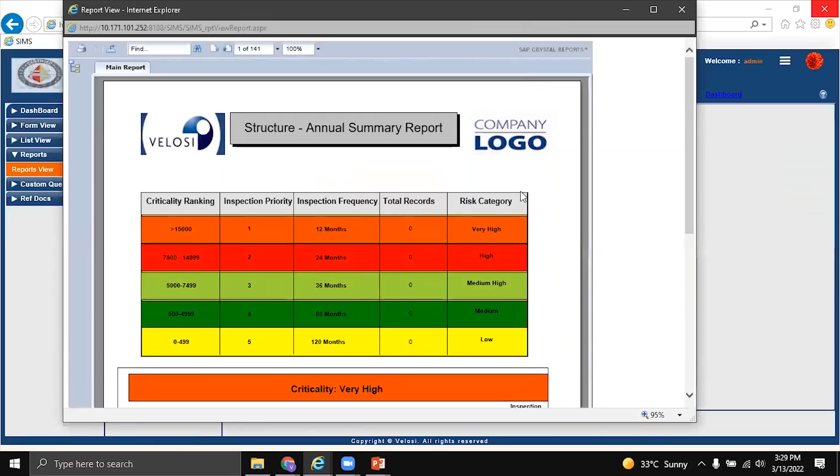So we have to select, and based on that, the system will create the report in this way, any report which we require. There are the custom query options.

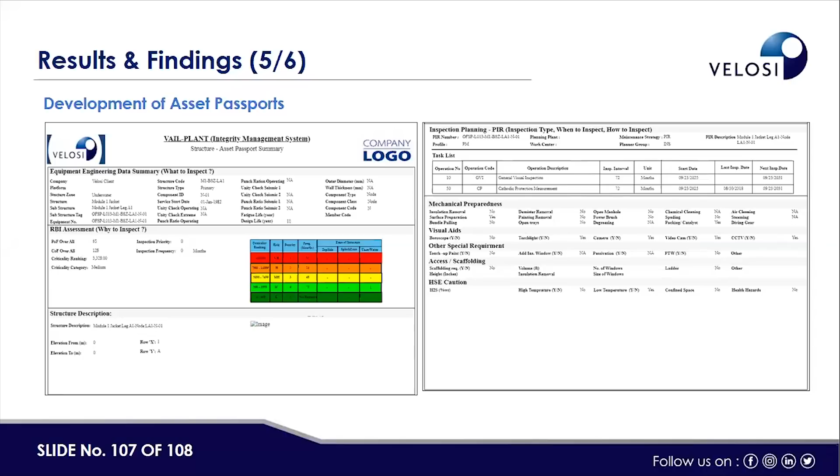Then in the reference document, we can attach different asset integrity management system standard operating procedures and others. Then we will go back. This is basically because for the software, we also provided another webinar, and in future we will also conduct a webinar for the software. So that's all.

Now we will go to the question and answer, because there are different questions which we already basically answered. This one: what can we do for repair method in dolphin pile product?

What are the standards for SIM for chemical manufacturing plants, especially handling corrosive chemicals like chlorine and acids? Today we basically mentioned the offshore standards, like API 2A, 2SIM, ISO 19900. So the ISO 19900 series is also applicable for onshore structures.

Can the tool get input from the SACS regarding member stress and unity ratio values in the form of direct importing data from the SACS analysis? Basically, from the SACS analysis we will take the information and put it into the software templates. So there is no direct integration.

We will use the data from the SACS. We will run the SACS, and whatever output comes from it, we will use as an input into the system.

There was one question: if a platform is designed based on API 2A structure and inspected using the normal program, what are the benefits of using RP 2SIM instead?